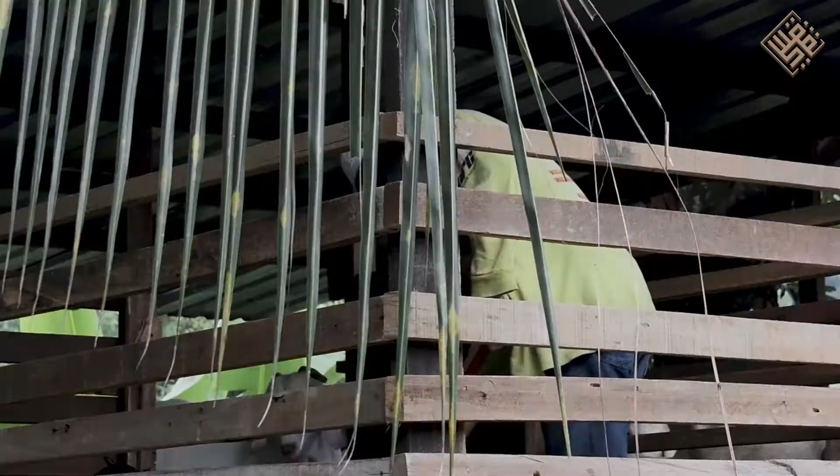Kampung Sungai Chinchin, a historical village that was developed 127 years ago. Here lies a historic building that contributed to the involvement of Islam in Tanah Melayu, known as Masjid Sungai Chinchin.

Selangor, a region of western West Malaysia occupying part of the coastal alluvial plain on the Strait of Malacca. In 1974, a portion of Selangor centering on Kuala Lumpur was designated as Wilayah Persekutuan, the Federal Territory. It is also surrounded by three other states in Malaysia: Negeri Sembilan, Perak and Pahang. Selangor consists of 9 districts: Sabak Bernam, Kuala Selangor, Petaling, Klang, Kuala Langat, Sepang, Hulu Langat, Hulu Selangor and Gombak. Selangor's history and economic development have been closely linked with three rivers: the Selangor River, Klang River and the Langat River.

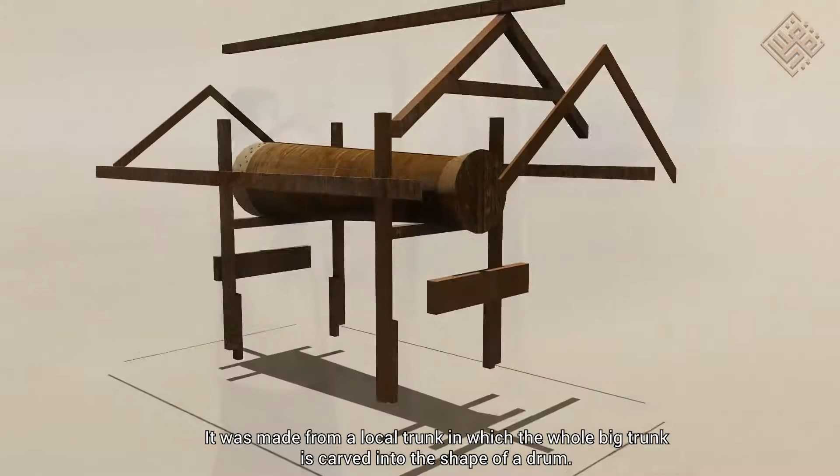During the time of Sheikh Muhammad Noor, the beduk was used as a sign for the call of prayer and to tell if someone was dead. It was made from a local trunk in which the whole big trunk is carved into the shape of a drum.

The beduk was still preserved until now and it has been relocated to the main entrance of the masjid. Moreover, a detention house was also built beside the masjid, applied for those who did not follow the Sharia compliances. It is stated that the people will be punished by reciting Al-Ikhlas 1,000 times, doing zikir and other acts that help in remembrance of God.

Dihitung bertekad menyeru masyarakat, gugurnya permata, tidak terhenti hikmat. Yang ditinggal tetap meneruskan hasrat, mematri jasa, bersulamkan amanat.

In 1921, Sheikh Muhammad Noor died at the age of 61. He was buried just beside the masjid, which was originally a graveyard. Soon after, three of his wives and six children were also buried at the same place. He is known for being one of the most important people who spread Islamic teaching in Kampung Sungai Chinchin.

Thus, Sultan Alaeddin Shah once paid a visit to Sheikh Muhammad Noor's grave and ordered the landowner to charge no fee for the land. It was gazetted to become a reserve mosque lot with no tax charge on 28 February 1922.

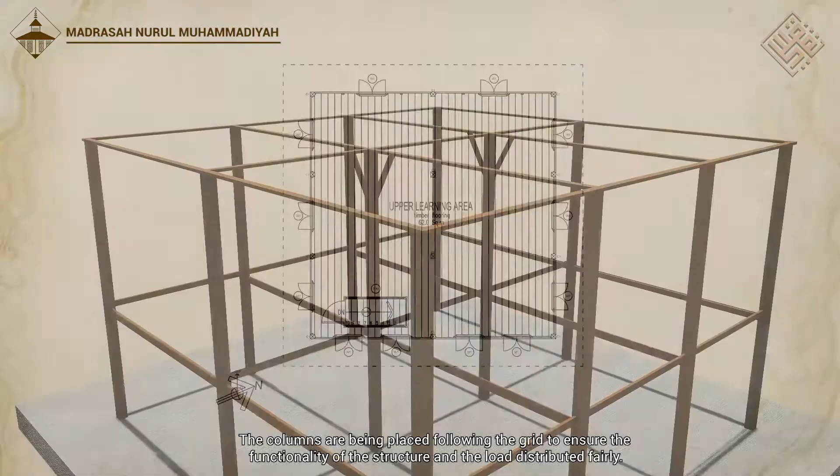There are a total of 12 columns that support the whole structure of the Madrasah Nurul Muhammadiyah. The columns are placed following the grid to ensure the functionality of the structure and the load is distributed fairly. The central columns are bigger than others to support the tiered roof.

The timber beam and column structure were joined using nails or pasak to strengthen the structure.

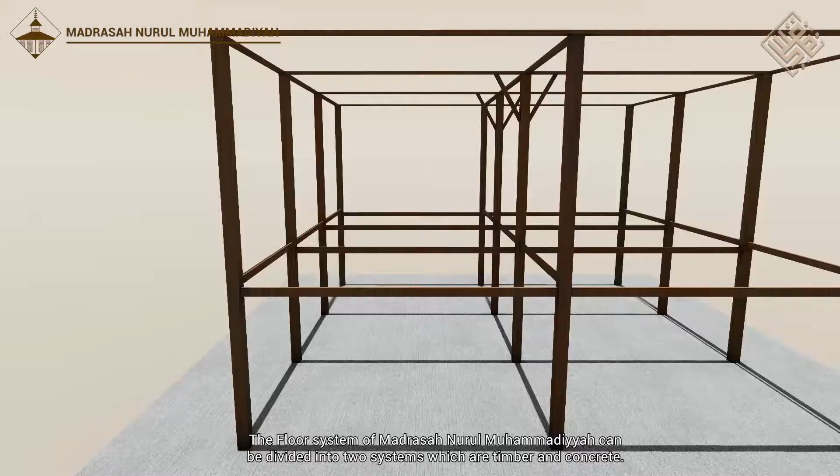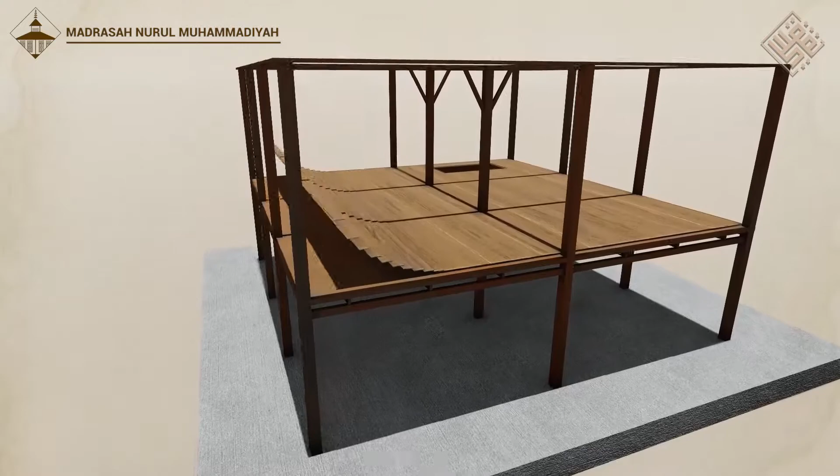The floor system of Madrasah Nurul Muhammadiyah can be divided into two systems, which are timber and concrete. The square prayer hall at the ground floor has a concrete flooring with a measurement of 8 meters by 8 meters. The main prayer hall on the first floor uses a timber flooring system with a layer of plywood planks and timber planks on top. The floor joists and timber girders are connected using a mortise and tenon joint system.

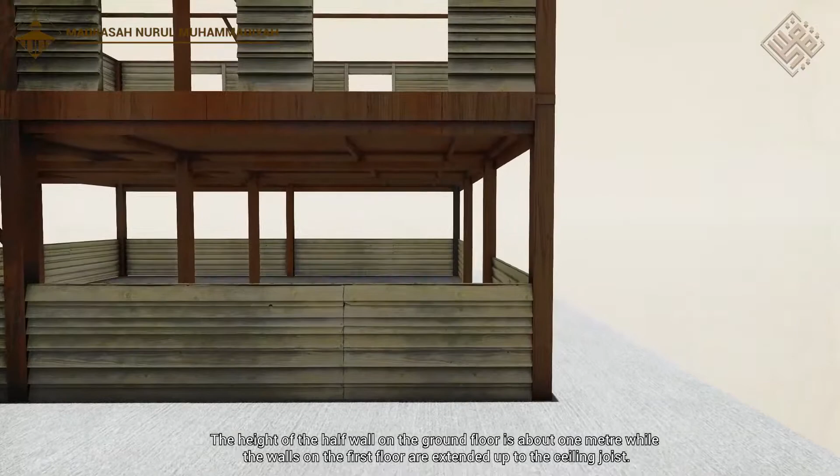Madrasah Nurul Muhammadiyah's wall is made up of timber. The height of the half wall on the ground floor is about 1 meter, while the walls on the first floor are extended up to the ceiling joists. The walls are covered by wooden boards with wall-mounted systems that overlap each other using the susun sirih system. The horizontal wooden boards are nailed to each other onto the wall stud.

In 1923, Madrasah Nurul Muhammadiyah used to have no doors but only openings to allow people to enter and exit the madrasah. On the first floor, the madrasah consists of 12 double-leaf windows built from timber with timber frames. All the windows are complemented with a set of railings known as pagar musang and have a kepala tingkap above it. The kepala tingkap uses a simple motif of jejala, lattice, to allow natural daylighting and to invite daylight into the madrasah throughout the day even when the windows are closed.

The entire roof structure of the Madrasah Nurul Muhammadiyah covered all the area of the prayer hall and was built using a timber construction system with zinc on top. There was also a small space between the roof which used to be a place for the muazzin to call for prayer. It also aimed to provide a stack effect inside the masjid to improve the comfortability of the madrasah itself. An awning roof was added on all sides of the madrasah to protect from rain and sunlight.

On top of the roof is where the mustaka is placed, an architectural decorative element that adds artistic value to the roof of Madrasah Nurul Muhammadiyah. According to Javanese belief, if the mustaka falls or is struck by lightning, it indicates that disaster will happen to the occupants, as it symbolizes a sign or fate for a building. There are several different types of mustaka in Javanese architecture, but Madrasah Nurul Muhammadiyah uses the floral type of mustaka.

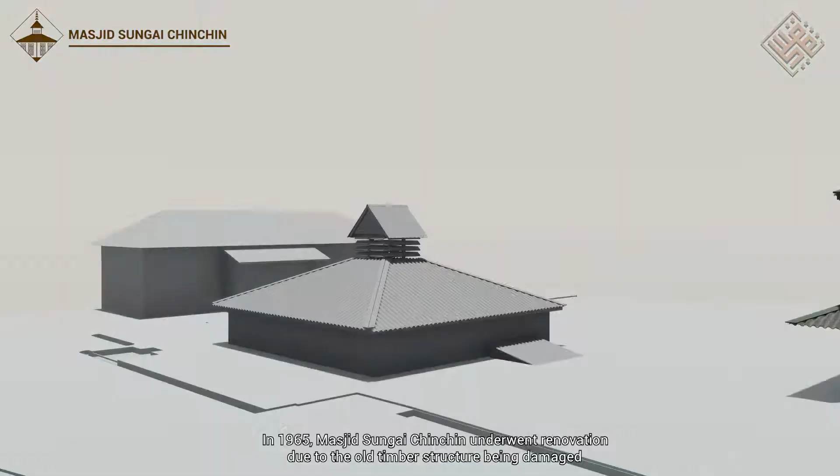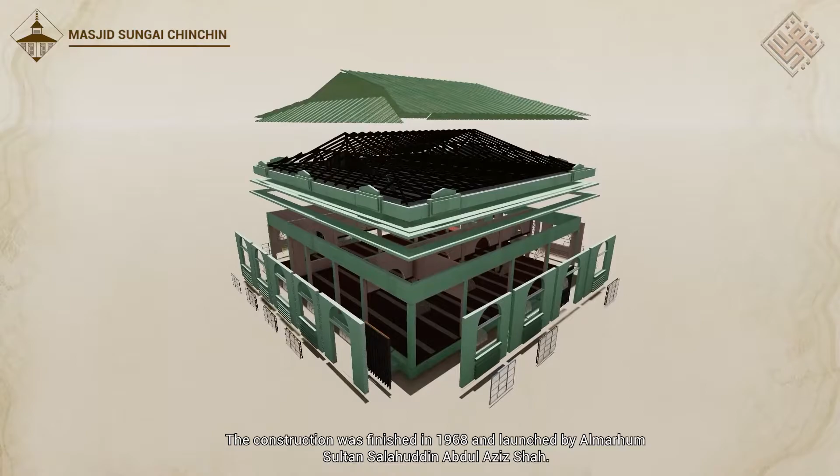In 1965, the Masjid Sungai Chinchin underwent renovation due to the old timber structure being damaged and no longer able to support the number of people. It was constructed using brick but not having any of the same elements of the old masjid. The construction was finished in 1968 and launched by Almarhum Sultan Salahuddin Abdul Aziz Shah. During the construction, the madrasah was shifted a few feet from its original location.

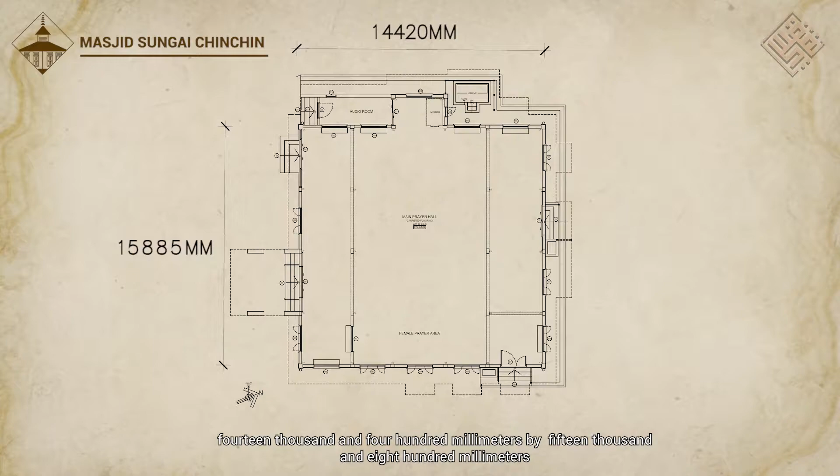The masjid was built with pad foundations as it is located near the river. The floor slab was located on top of the ground beam and the floor is raised 580 mm from the ground. The dimensions of the floor which covers the prayer area is about 14,400 mm by 15,800 mm.

There are 4 types of columns that were constructed as the columns for Masjid Sungai Chinchin. Each type of column was different in size. All of the columns are constructed directly from the pad foundation up to the wall beam that supports the roof structure.

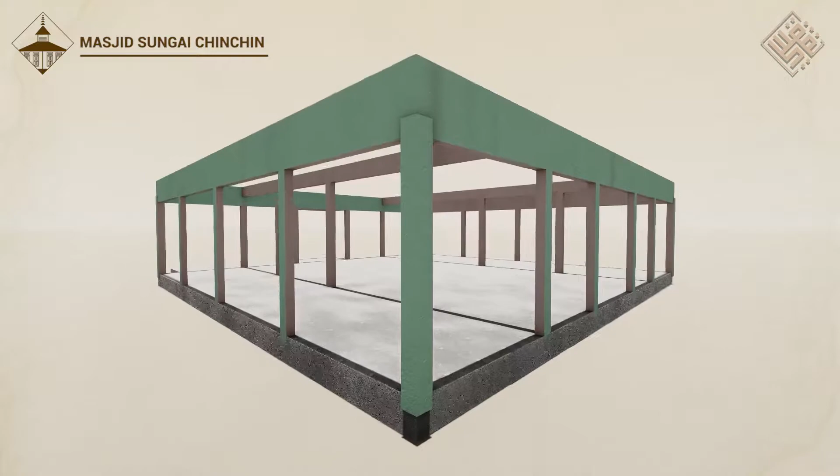The exterior brick wall was constructed with openings and doors. There are 4 doors that can be used by the user to enter the prayer hall, and the other 2 doors were used to enter the audio room.

There are 15 windows, and most of the windows are topped with an arched fixed glass pane. The glass panes were in semicircle shape. Some of the window panels can be opened for ventilation purposes, and some of the window panels cannot be opened as they are attached with timber bookcases.

There are ventilation panels below each window. Each set of ventilation panels consists of 8 hollows in rectangular shapes. Ventilation panels, known as lubang angin, were designed in the building to allow fresh air and natural daylight to pass through.

The interior wall connected with the secondary columns inside the prayer hall is designed with an arched fixed glass pane. The walls are offset from the floor level where the arched glass panes are made. There was a keyhole arch located at one of the prayer hall's entrances that brings ambience and a sense of welcoming to the visitors.

The roof is constructed with a Dutch gable roof. This roof helped to avoid any water ponding and leaking into the main prayer hall.

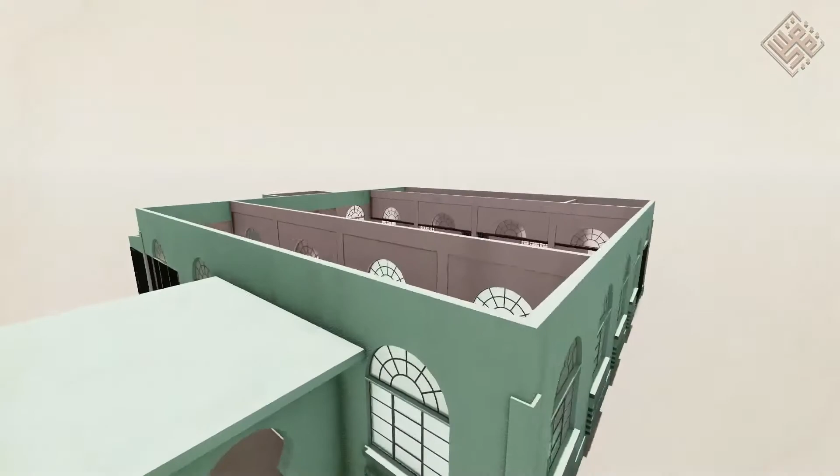The roof structure is made from timber and layered with corrugated metal roofing. The geometric parapet wall was constructed from brick and concrete around the perimeter. Two domes were designed and placed on top of the roof at the northwest and southeast side.

It is made of reinforced concrete, and molded steel rods are used to form the hemisphere shape of the Masjid's dome. On top of the hemisphere dome, concrete is shaped to create a cone form to symbolize the crown or apex of the dome.

The interior floor of the masjid is carpeted with a red carpet featuring a small geometric pattern.

Inside the Masjid Sungai Chinchin, there is also an old mimbar made of timber and coated with dark brown paint. The ornamentations on the mimbar are mainly inspired by a geometric motif that shows symmetrical balance. Later, due to maintenance, it was replaced with a new stainless steel mimbar.

It has a small dome on top of each corner with a simple geometric carving below. At the splat of the mimbar seat, there is a carved ornament with a floral motif, with a focal point or punca bunga as the datum of the ornament.

The masjid is surrounded by 5 stairs located outside the prayer area. Two of the stairs are connected to the outdoor area, two other stairs are connected to the spillover area towards the madrasah, and one stair is connected to the audio room. Outside the mihrab of the masjid, there is a kubur contoh built by Sheikh Muhammad Noor.

His intention was for it to be a reminder to the people who are still alive. He built several kubur contoh around the masjid, but only one still exists until now and has been concreted.

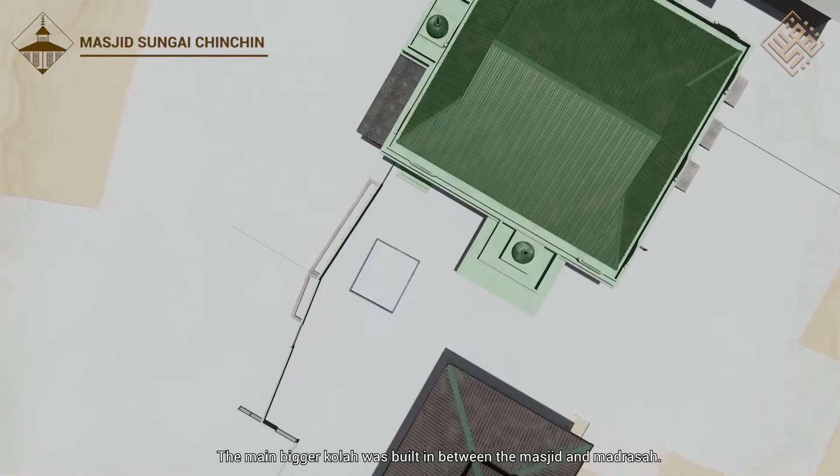Two small kolah were built at the northeast and southeast, attached to the masjid. The main bigger kolah was built between the masjid and madrasah. However, in 2006, due to the increased number of jemaah, the kolah was moved to its current location.

The area was then renovated as a spillover area with white tiles. It became a multifunction area for many activities and also a prayer area during Friday prayer.

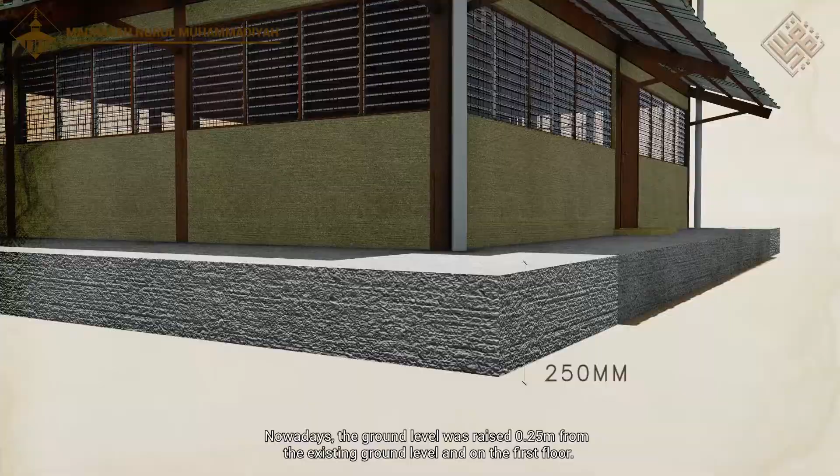Nowadays, the ground level has been raised 0.25 meter from the existing ground level, and on the first floor, a new layer of timber flooring was added on top of the old flooring. Both floors were also covered with carpet.

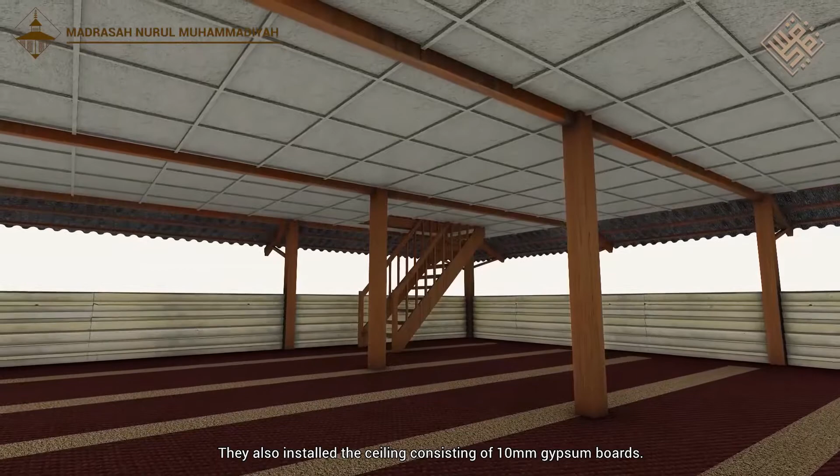They also installed a ceiling consisting of 10mm gypsum boards. The ceiling consists of timber frames and battens which are connected to the timber joists.

After renovations to the ground floor, the half wall on the southeast and southwest elevations was changed from timber materials to concrete walls, as can be seen in the current building. This is due to the old timber walls being damaged over time. A fixed jalousie glass window and a steel mesh grille are also built together along with the concrete wall.

The madrasah has retained the original form of the window from its construction day, but the current madrasah only has several windows remaining after some renovations.

There is also a timber back door added at the ground floor, which is most of the time locked and unused. A single leaf waffle steel door grille with steel framing is added to provide security for the upstairs prayer hall. The awning roof on the southeast and southwest side was removed, and the material was changed from zinc to metal decking, which is more durable compared to zinc.